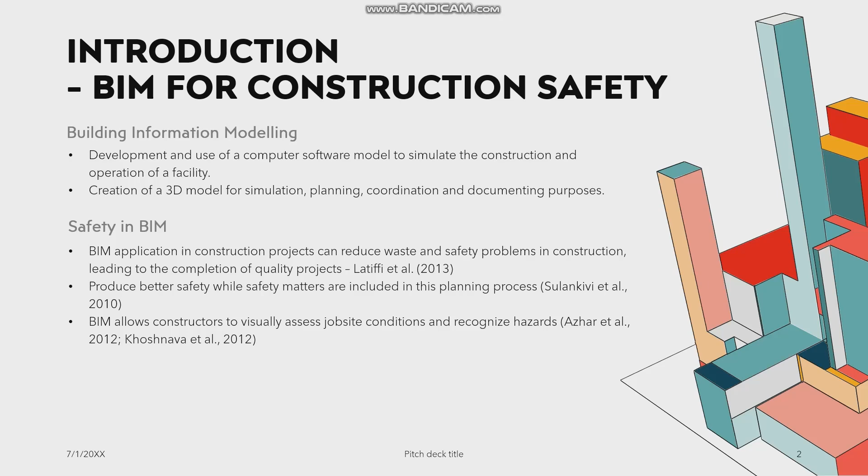Next, BIM in the Malaysian construction industry is to provide effective leadership and coordination to construction industry players. The government body has established the Construction Industry Development Board (CIDB) of Malaysia, which was established under Act 520 on 24 July 1994.

The concept of BIM, or true BIM, will help engineering, architecture, and construction professionals move toward a more automated, successful, and collaborative way of working. BIM-based design techniques tend to reduce the difficulty and complexity of project management.

Regarding awareness of BIM in safety planning, the potential benefits of this technology are still not discovered by the majority of construction players, including stakeholders, as the implementation of BIM is not taken seriously in Malaysian construction. Performance and productivity will increase throughout the project life cycle if BIM is implemented successfully with the proper sequence at the construction site.

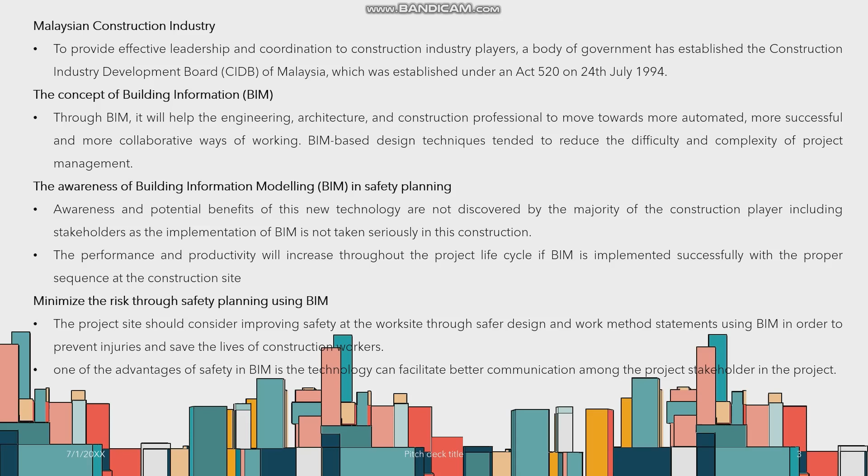This can minimize risk through safety planning using BIM. The project site should consider improving safety at the work site through safer design and work methods using BIM, in order to prevent injuries and save the lives of construction workers. One advantage of safety in BIM is that it can facilitate better communication among project stakeholders.

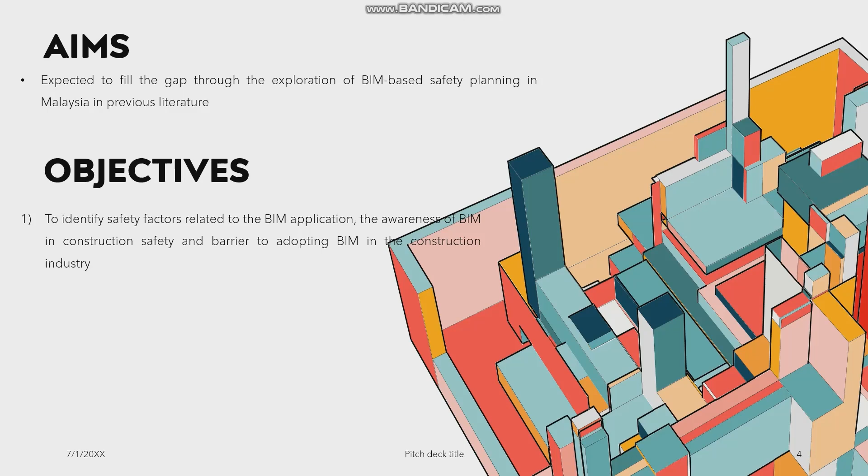Now, the aim of this research is to fill the gap through exploration of BIM-based safety planning in Malaysia in previous literature. The objectives are to identify safety factors related to BIM application, the awareness of BIM in construction safety, and barriers to adopting BIM in the construction industry.

We move to the pilot study survey. The methodology adopts a questionnaire survey method to gain feedback and perceptions from individuals of a larger population, using a mix of open and close-ended questions to capture the background of individuals and the central phenomenon of the research.

The questionnaire findings are primary data, being first-hand data received from respondents. The data was collected from March to April 2022, and this research only focused on the central regions, which are Kuala Lumpur and Selangor, selected based on the highest BIM implementation in Peninsular Malaysia.

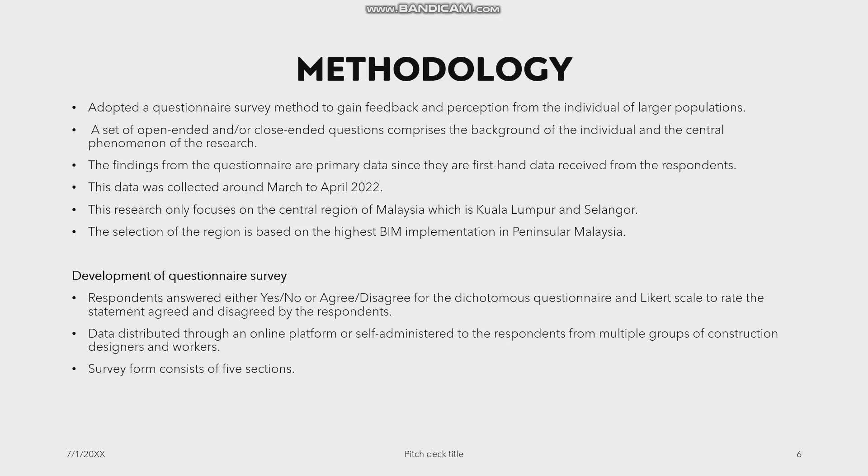In developing the questionnaire survey, respondents answered either yes or no, or agree/disagree, with a Likert scale to rate their agreement or disagreement with statements. The data was distributed through an online platform or self-administered to respondents from multiple groups of construction designers and workers. The survey form consists of 5 sections.

This section asks about knowledge of BIM, the benefits of BIM in construction safety, the application of BIM, and the conventional method compared to BIM, including the respondents' opinion on changing from the conventional method to BIM technology in their construction safety practices.

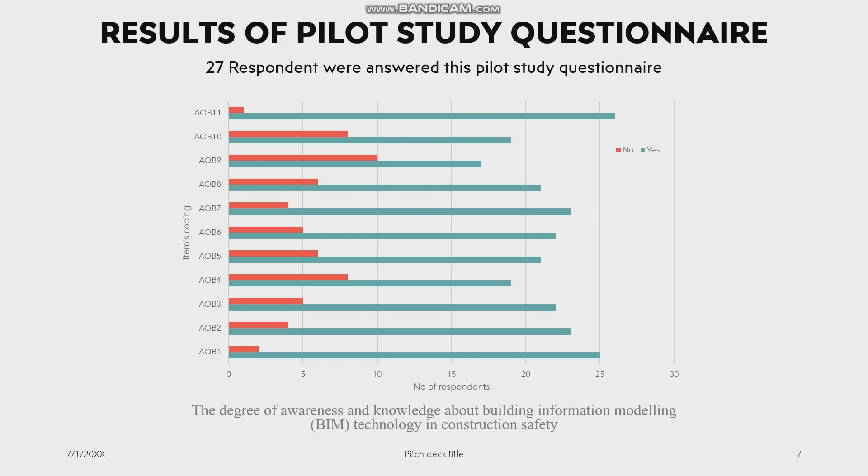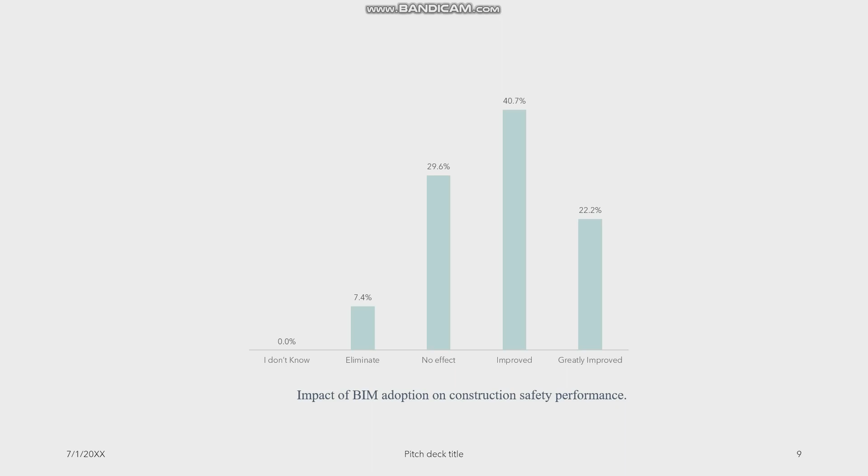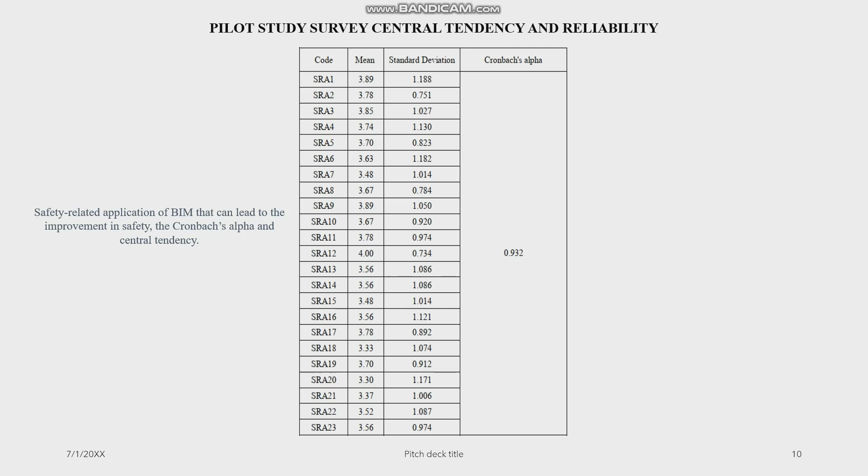Next we go to the pilot survey study central tendency and reliability, which shows that the reliability of the pilot study questionnaire is acceptable based on the central tendency analysis. The mean values range from 3.3 to 4. It can be seen that all factors are in the range of important to very important, and the Cronbach's alpha of 0.932 indicates this questionnaire has high reliability.

Next we go to the barriers that prohibit BIM adoption in construction safety. This session was divided into 4 groups and constructs, which are people, government, client, and technology related tasks, and the items were coded.

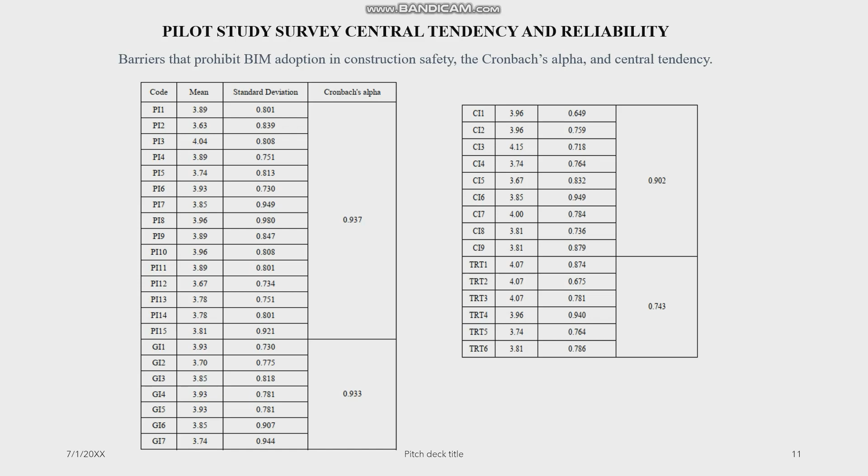Based on the sensitivity analysis, mean value reported that the client factor is the highest ranking significant important factor, with a mean value of 4.15, followed by technology related tasks with a value of 4.07, and people factor with a value of 4.04, with the range of central tendency from 4.15 to 3.63. This shows which item is the highest ranking significant factor for this section. The result also revealed the Cronbach's alpha range was 0.743 to 0.937 in the construct; hence all the relevant data is reliable.

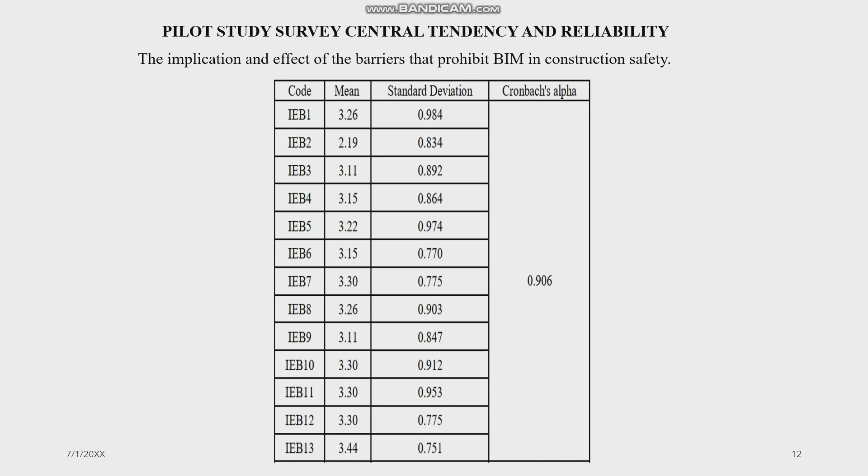Next we go to the implication and effect of the barriers that prohibit BIM in construction safety, which indicates that the Cronbach's alpha of 0.906 is high reliability and acceptable.

The conclusion, based on the result of the pilot study questionnaire, shows that the reliability of the pilot study questionnaire is assured, and this research shows that there are barriers to adopting BIM in construction safety, along with safety related applications of BIM that can improve the safety industry in Malaysia. The power of this technology will help the country in minimizing safety risks at the construction site.

It is recommended to conduct training courses on BIM technology concepts and benefits of the application to introduce and give awareness on this application.

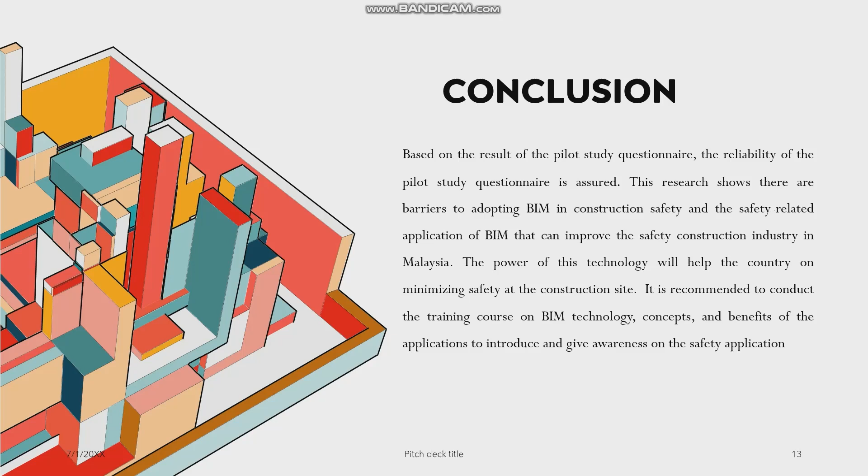For the recommendation, there is some information that needs to be added in the next questionnaire to improve its quality, and more barrier factors have been figured out and will be reflected in the next questionnaire.